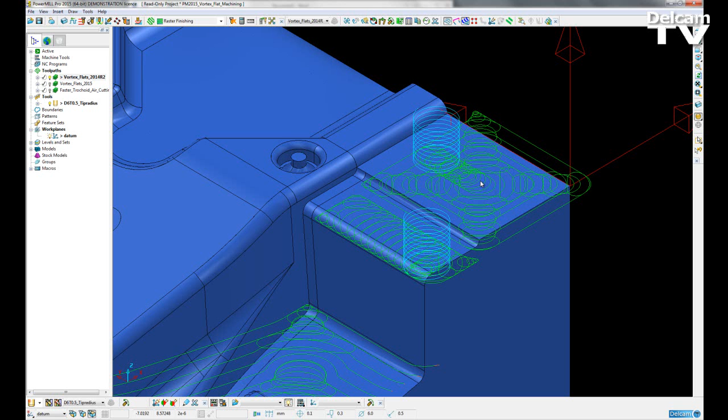This removes the need for entry moves and helical ramp moves, such as we can see in this example here. If the flat slice has an outside edge from which we can approach, if the approach does not gouge the model, and if it is wide enough to survive profile smoothing, we will approach from outside the stock.

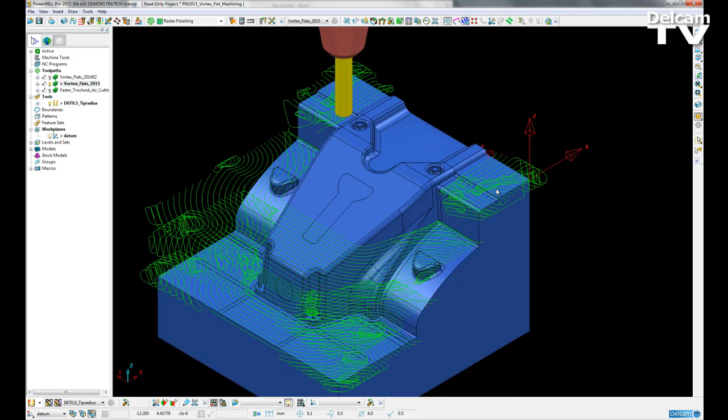There are no user interface changes made to this; it is just a behind-the-scenes fix for the Vortex roughing toolpath. So if I activate my second toolpath here, we will now see that the entry ramp moves have been replaced by extended cutting moves. This reduces the machining time and makes the toolpath generally more efficient.

The second improvement made to Vortex is the ability to control how the tool moves during non-cutting moves in the toolpath. There are two ways to control these non-cutting moves. That is, for very long trochoids or links, we can lift and move at a rapid, or for normal sized trochoids, we can move at a higher feed rate without lifting. So to do this, there are two new controls. That is the non-cutting feed rate and also the maximum link length.

So if I open up my strategy like so, I can then go to the Vortex page and we can see we have the two new options here. So the first one is to activate the increased feed rate for non-cutting moves. This is defaulted to twice the cutting feed rate. However, you can put in any value you like.

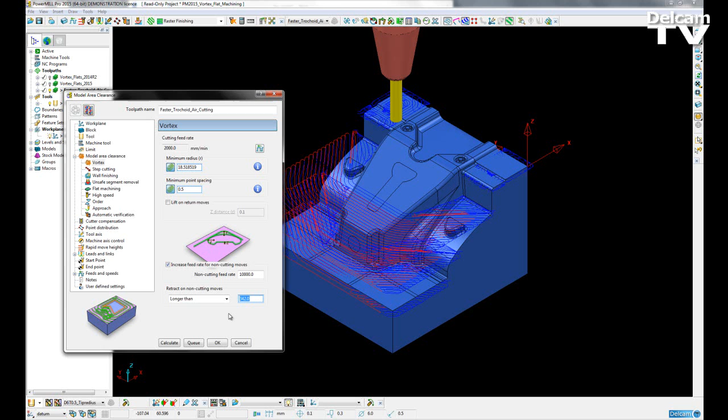The second option is to tell PowerMILL to retract on non-cutting moves depending on the length of the link move. So we can set it to never retract, automatically retract, and in this instance a value is read only, or else we can set it to longer than, where we give the length of the link move, which is the cutoff point from where it will retract. If the trochoid or link move is very long and beyond the maximum link length, then it is simply removed and a lift is put in instead.

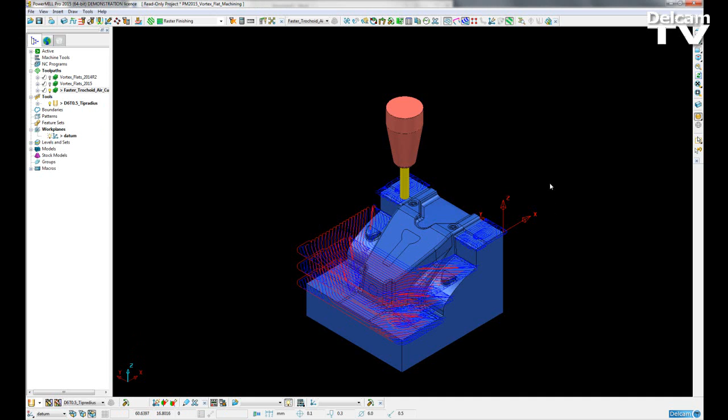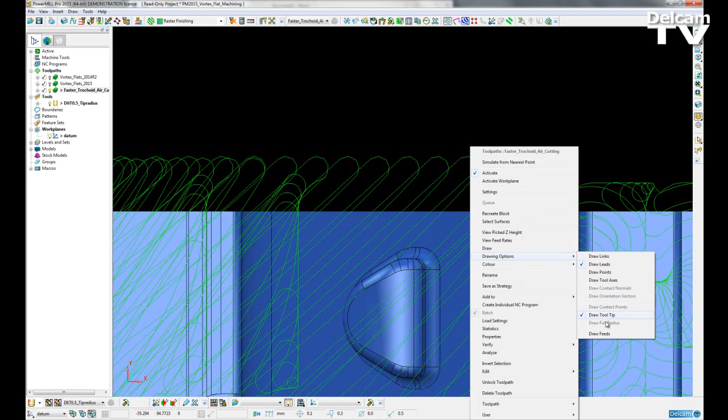Once we have inputted our settings and calculated the toolpath, we will then get a toolpath where in this view the red sections signify an increase in the feed rate. I have the drawing option of draw feeds on. If I turn it off, you can see that the toolpath looks the same, but turning back on, the information dialog box will pop up and we can see that the reds signify our non-cutting move feed rate, which was at 10,000.

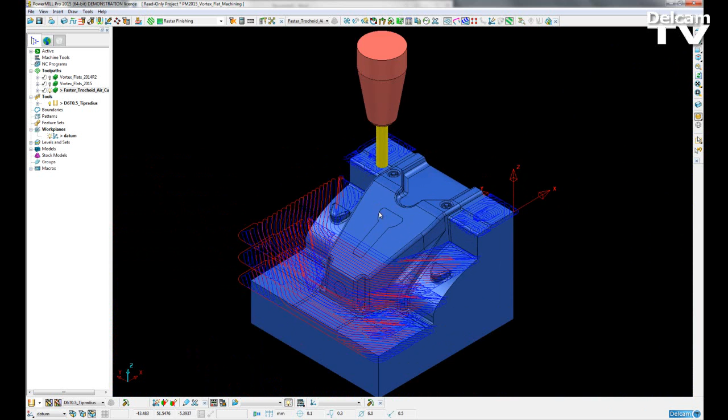So increased efficiency over flat areas, and then the ability to control our feed rate for non-cutting moves are the two main improvements made to the Vortex roughing strategy in PowerMILL 2015.